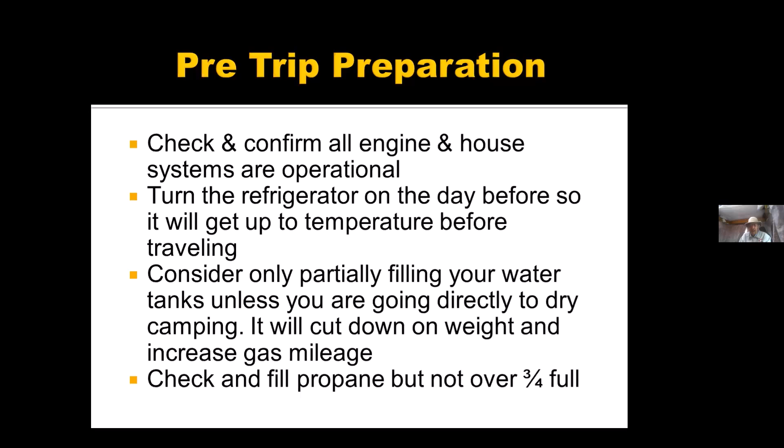There are some things you have to do before you leave home. The most important thing I can suggest is to make sure all your appliances are working properly. It's too late to find out when you're 500 kilometers from home that your fridge isn't working, or your heater or hot water tank isn't working. So check everything, and make sure you have enough liquids in your Roadtrek, like propane, gas, water, and so on. Most people make a little pre-trip checklist and go by that.

Some people refer to these as idiot lights because in many cases they don't work. I've been lucky that mine have always worked, and I think there's a trick to that, especially for the freshwater, holding water, and gray water lights. The trick is that you must really clean out your black water tank properly at the end of each trip. One thing I usually do is use a gadget like a hose with a twist, with a brass tip at the bottom that rotates and cleans out the tank. So if your lights aren't working, try cleaning out the tanks properly to make sure the lights work.

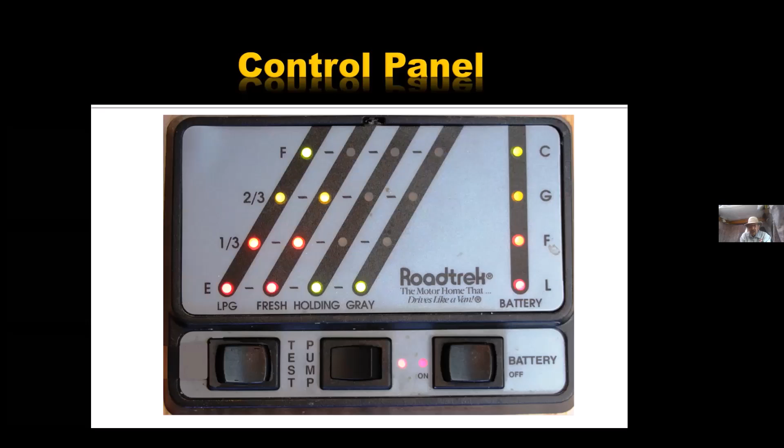As far as leveling is concerned, I don't pay too much attention to it because most of the time the sites are reasonably level. What I do is try to make the rear of the Roadtrek slightly higher than the front, because when I open the washroom door, it swings out and doesn't come back at me. So I make it about an inch higher at the back. Other than that, most people think normal level within an inch front to back should be okay.

For your fridge, which works on an absorption basis, ammonia absorption, if it's too much out of level, the fridge will not work for you.

The other thing is checking the voltage. If you're hooked up to power, you have to check the voltage. There are several gadgets available to check it, and recently there was a discussion about making sure the voltage doesn't fluctuate too much. There are all kinds of gadgets available, one of them called Surge Guard.

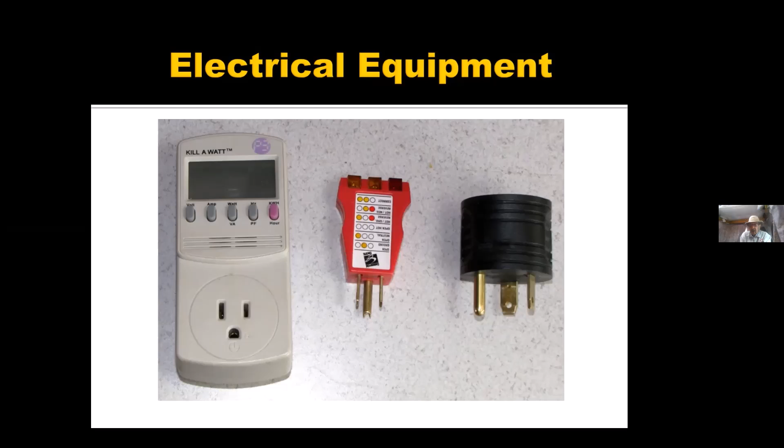So the moral of the story is that if you can have a gadget that checks the voltage on the pole where you hook up, it's a good idea. There are some gadgets shown here to check the voltage.

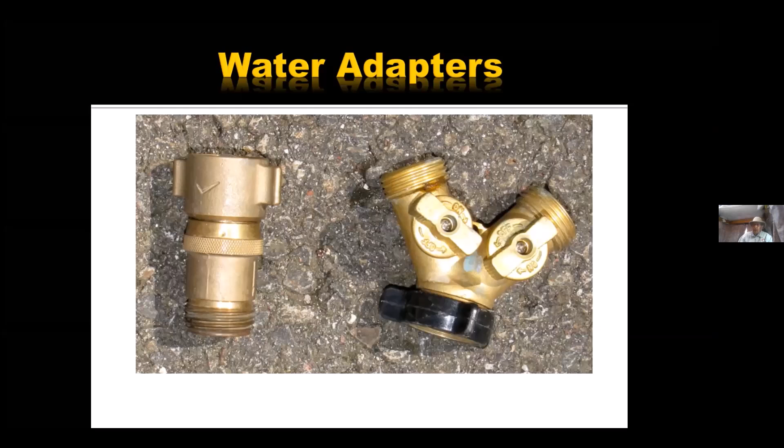Okay, so a couple of points here. I already talked about shore power. As far as the generator is concerned, for those who have one, it's not a good idea to run it when you're in a crowded campground because it will be a noise generator. So in many places, most people ask their neighbors if it's okay to use a generator for a little while. If you're boondocking, of course, there's no problem, you can use the generator.

The thing about a generator is that you have to make sure it is working properly. The secret to that is to run it off and on. Even during the winter, I run my generator for about 2 hours per month. It's called exercising the generator, and that keeps it going.

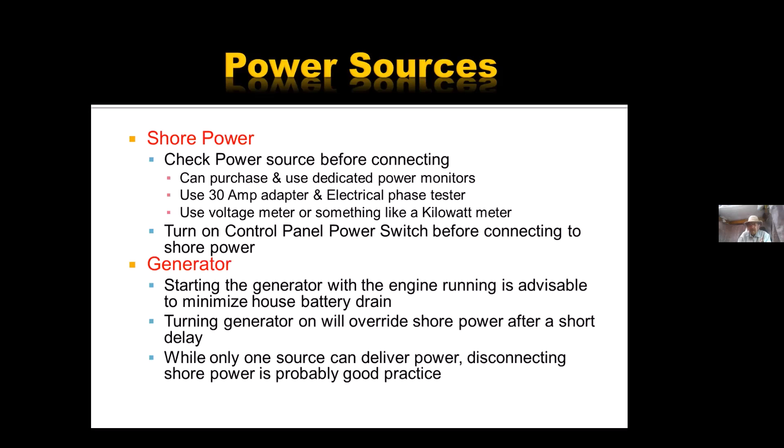Another thing I should point out is there's a product you can buy at a store called Seafoam. This product is extremely useful for cleaning the carburetor in the generator and running it smoothly. What I usually do is put a can of Seafoam every second fill-up of the gas tank. Also, sometimes if the gas goes down to about a quarter of a tank, I put in a can and run the generator for about an hour. The whole idea is to keep the carburetor in the generator working.

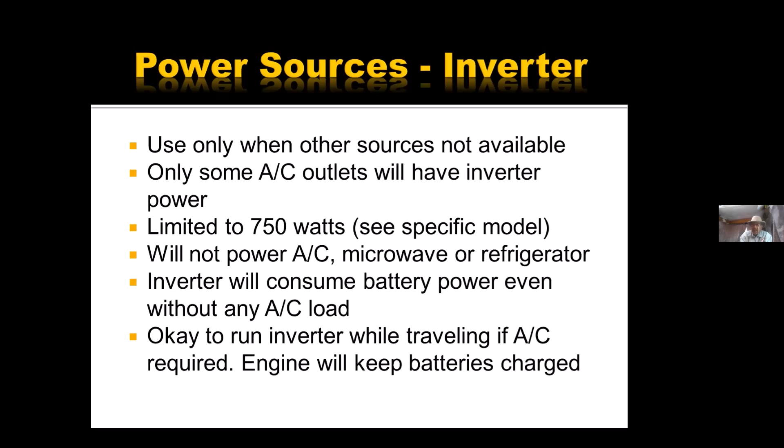Some people have inverters on their rigs. I don't have an inverter, I have a gadget called a power box. It works like an inverter, but it's also an additional battery I can use. The important thing to remember is that with inverters, unless you have one of the more recent ones, you can only power small appliances like computers and iPhones. You cannot run the air conditioner or the microwave on an inverter. So inverters are meant for small appliances. When you're traveling and driving, the inverter will keep charged up. So if you don't have an inverter, you can kind of add some sort of inverter yourself.

There are safety monitors in the Roadtrek for carbon monoxide, propane, and smoke. The important thing about these safety monitors is that you have to keep them up to date. I didn't realize that, I thought my monitor was working because there's a test button, and if it beeps, it knows it's working. But when I talked to the technician at Mobile Life, he said that even though it's working, it's a good idea to replace them every 5 to 10 years. So it's just a safety feature.

The other thing about the monitors is that on the control panel I showed earlier, there's a switch called the battery switch. If the battery switch is left on and the Roadtrek is sitting on your driveway, at some point your house battery will go down because these monitors, which are hooked up to the battery, continue to use power. So if you expect the Roadtrek to be parked for any length of time, turn off the battery switch. Also, if you take the Roadtrek to a garage to get it repaired, turn off the battery switch. These are the 3 kinds of monitors that most people have, and again, change them if you haven't changed them for a while.

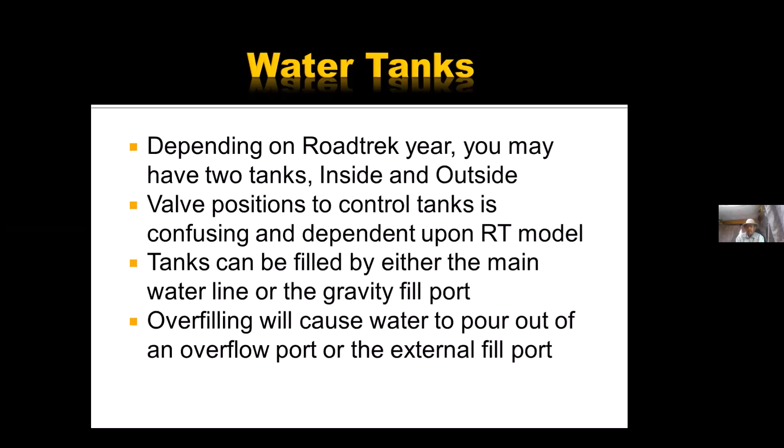I think you may get into solar and generator more later, but there's a question, does anyone have a solar generator? I think we'll address that later in the presentation. Okay, just remind me about it.

This is concerning the plumbing system of the RV. There's a pump, and some people put a filter on the outside water coming in. Some people use a pressure regulator. I have a pressure regulator, sometimes I use it, sometimes I don't.

I think the thing to do is, when I turn the tap on the hookup, I don't turn it on completely, I just turn it on just enough so that there's enough water coming into the RV. But it's a good idea to have a pressure regulator so that you don't end up bursting the pipes, since the pipes are all plastic.

As far as the pump is concerned, sometimes if there's a leak in your RV somewhere, off and on during the night you will hear the pump come on. So the thing to do is either try and find where the leak is, and if you can't find it, just turn the pump off during the night so you can sleep peacefully. I had this problem one time, and eventually I found the leak and fixed it.

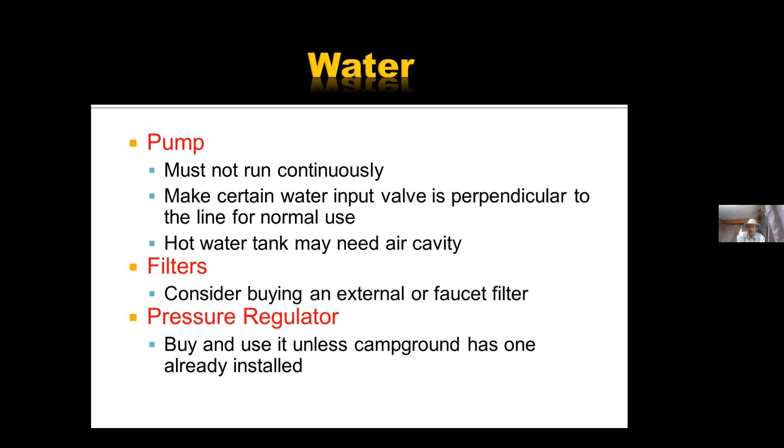You had a comment there about an air cavity. The hot water heater may need an air cavity. That's a surprise to me, I wasn't aware of that. There has to be an air cavity at the top of the hot water heater.

That's what, and I think that has something to do with the workings of the T and P, temperature and pressure valve that is in every hot water heater. The temperature and pressure valve works best if there's a little bit of air at the top of the hot water heater. So how do you tell if there's an air cavity there?

You can't tell that. You just hope that it's working. And if you find some problem with it, then you drain the water and make sure that your temperature and pressure valve is working properly. Some people have had to replace them.

This is the setup for the city water. The black knob is turned vertically. That is its regular position. When it is parallel to the pipe, that means the city water is being put into the freshwater tank. This looks different in different Roadtreks - in mine it's like a gray tap, in this one it's just a black tap. The important thing to remember is that when this valve is perpendicular to the pipe, the city water cannot get in. In order for the city water to get in, you turn it parallel. And then don't forget to turn it back, otherwise your water pump will not work.

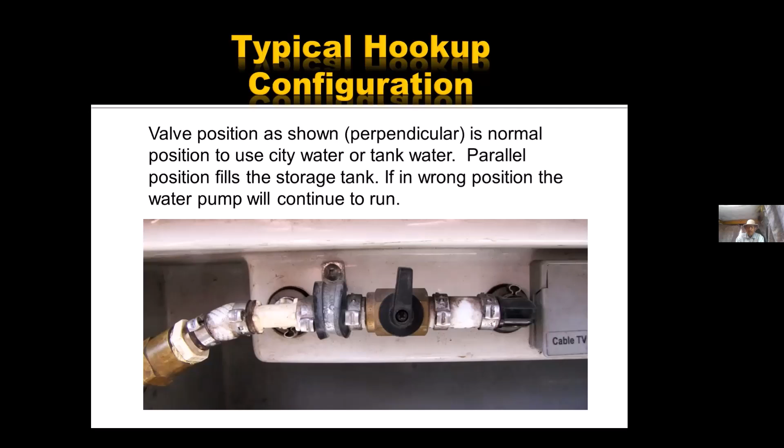Yeah, I have a water leak from the top of my freshwater tank. When I fill it, it starts just pouring out all over the place, and the water does. I can't find the leak because I figured it would be a cracked fitting someplace, but those are usually on the side of the bottom, and I can't get my head up in high enough to see where the water leak is coming from. Anybody else have this problem?

Dan, you don't have to worry about that. I also have a similar situation. When I fill up the freshwater tank, when it is completely full, there is an overflow valve, or overflow opening in the tank, and the water drains out of that overflow opening. That really tells you your freshwater tank is full and you have to turn the tap off. So it's not anything to worry about, as long as your monitors on the control panel tell you that you have a full tank. I watch for the monitor when it reaches the green light. When I see the green light, I know my tank is full. I don't wait for the water to come out of the overflow valve, I just turn the tap off. So I don't think it's anything to worry about if it only happens at the time when the tank is full.

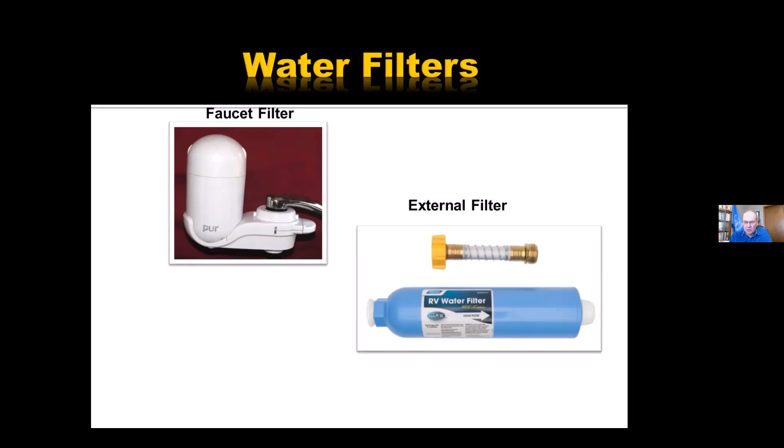Okay. Now, I already talked about the black and gray water tanks, and I mentioned that those lights are not usually always reliable. So the best thing to do is to try and flush out the black water tank.

I wanted to show you this gadget that I have that I use every time I flush it. This is the gadget. Here at the bottom, it has a turning wheel, and when you hook this up to the hose pipe, this wheel turns and sprays water inside the tank. So every time I do the black water tank, I try to flush it out.

Now, of course, in some cases you don't have availability of water to flush it out, but then you can wait until you get to a place where there's water to flush it out. The other thing I should mention is that sometimes if you're parked in a campground and there is a drain hole at the campsite where you can drain your black water tank, it's a good idea not to drain it while you are using it. It's a good idea to let it build up, let the water level build up, and then just before you leave, you can drain the black water tank.

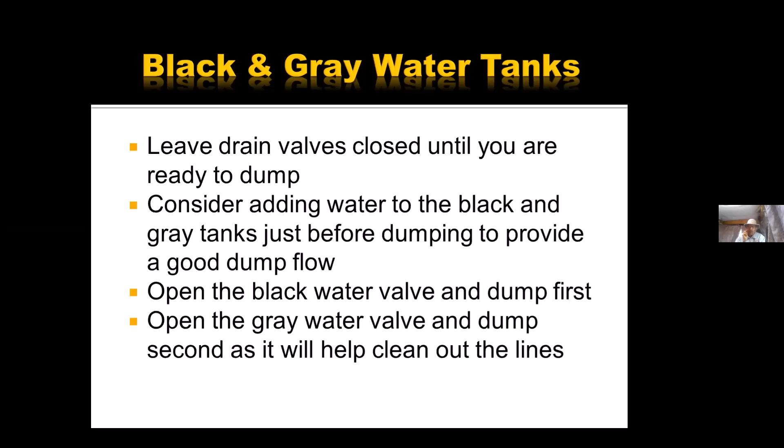Make sure that the two handles you have, the gray water handle and the black water handle, are pushed back in before you take off. These are the two handles.

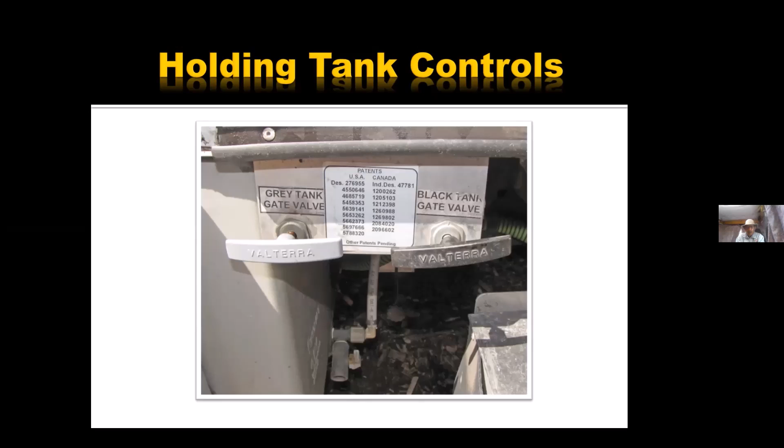When I got the Roadtrek first, both handles were colored black. So in order to remind me which is the gray water tank, I just took some gray paint and spray painted the gray water tank handle, so I know which one is which. Small trick.

Now, some people have macerators. I don't have a macerator. If you go on the internet, on the Roadtrek International Cyber Rally site, you'll find all kinds of issues with the macerator. In the beginning, when the macerators came out, there was a big issue about the macerator hose. It kept breaking up and people didn't like it, so there was a lot of talk about how to replace the macerator hose.

One thing I've found out in talking to people is that if the macerator gets stuck, there should be a way to manually rotate the propeller. I don't have a macerator, so I can't give much advice on it. The only thing I can say is that I have friends who have macerators, and I've seen them turn on the engine to charge up the battery before they use the macerator.

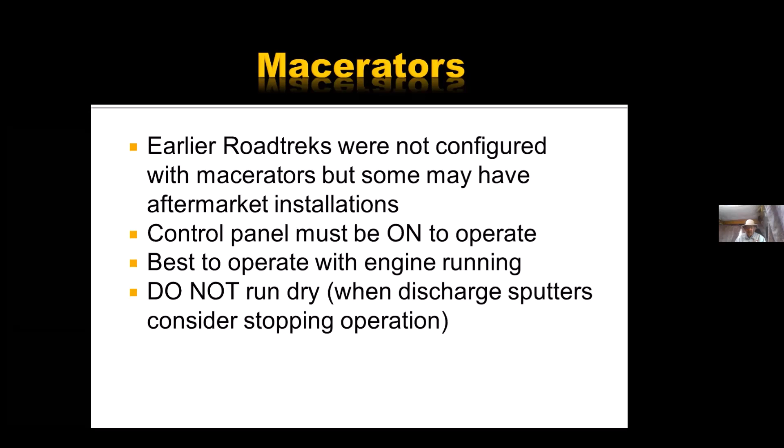Then Sam had a question on the dump valve. Sam, do you want to hit your space bar? Hey everybody, hi, it's Sam. Hi Sam, hi everybody, hi Harish. Hi guys, very quick question.

I know it's a bit of a silly question, but it was never clear to me from the start. I was always advised to dump the black first and then dump the gray so that the gray would flush out the black. But I haven't actually crawled under the vehicle to see how that valve mechanism works. Would I pull out the black valve, close it, then open the other one and close it? Or would I leave the gray one open, leave the black one open, and then pull the gray one so it flushes everything more thoroughly? Does it make a difference whether I leave the black valve open as I flush the gray tank? Does anyone have a quick answer for that?

I have always left the black valve open when I open up the gray valve, and I keep both of them open until after I have flushed it. The reason to leave the black valve open is because you also want to flush it. So I don't think you need to close the valve after you've drained the black water. You leave it open until the end of the entire operation.

Okay, perfect, because I wasn't sure. Initially I had pulled the black, flushed that, closed it, then opened the gray, flushed it, and then closed it. But what you're saying now is I can leave the black plunger pulled out as I pull out the gray at the same time, to flush it even more thoroughly.

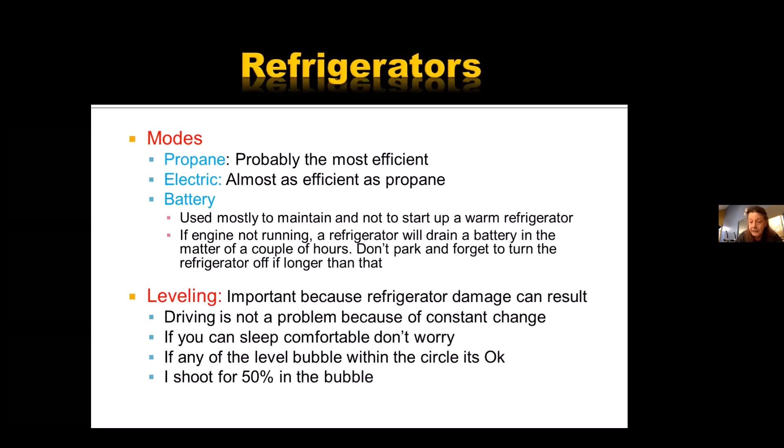Those of us who answered pretty much all said it's a very common problem. The fridge works much better on propane than electric in general, and does not work well in high temperatures either way. Some suggestions were a small refrigerator fan placed in the fridge to circulate air. Another common solution mentioned is filling two plastic bottles with water, putting one in the freezer, and rotating them from freezer to fridge to keep extra cooling product in there. Someone also mentioned making sure the fan blows across the cooling fins. But most of us just know it's one of those things you live with on the Roadtrek.

One other point I should mention is when you are done with your trip and come home, take your stuff out of the fridge, put them away, and leave the fridge door open so the water inside evaporates. Otherwise, mold will build up inside the fridge. What I do is spray the inside with some vinegar, clean it up, and then close it. For the next trip, I'm ready to go.

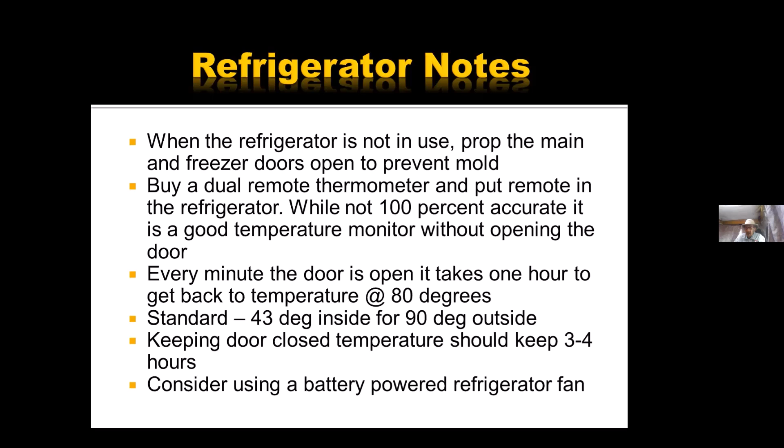So it's a good idea to keep the fridge free of mold. The only way you can do it is to make sure there is no moisture in the fridge, and to do that, you just leave it open for a while.

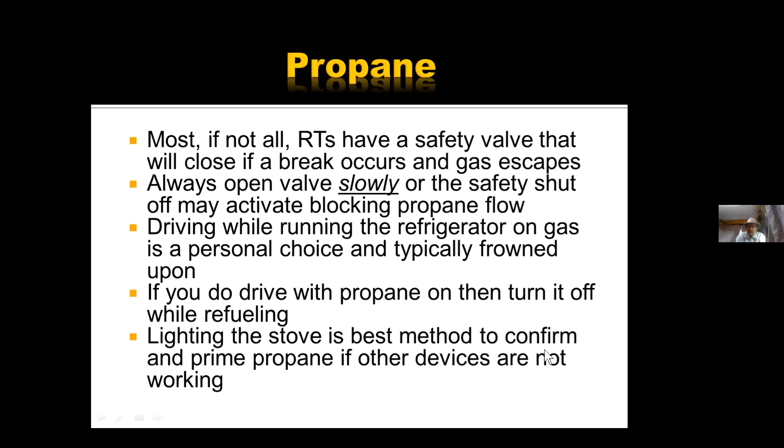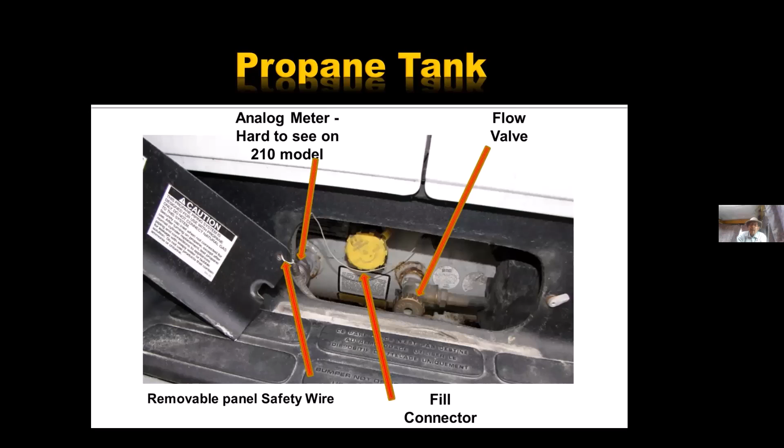One other thing is that in most of our vintage Roadtreks, the regulator for the propane tank is situated on top of the tank. It's very difficult to get to. So if you have any issues with the propane, you may have to spend some money to get a technician to get to the top and fix that regulator. I think it's called a regulator.

Generator, I already talked about servicing it. A lot of people have problems with generators. There's not much you can do about it, just keep on top of it. The most important thing is to make sure that it's exercised regularly.

Air conditioner. I have replaced my air conditioner twice, and I have to tell you that it's not an easy process. The air conditioner is sitting at a very awkward place, and in order to remove it, you have to approach from the back. You have to take out the grills at the back, and you have to take out the goop that's holding the air conditioner, and then one person pushes it from the back, and another person pulls it from the front, and you take it out, and then you replace it. So it's not an easy process.

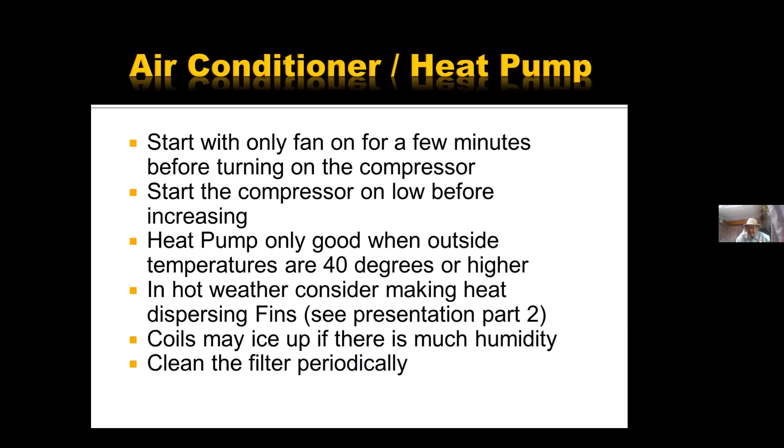Can I carry on? Yes, we got the rally right here, and we got the international Roadtrek rep here doing it. So we've already got our own cyber rally, man. Yeah.

Can I also add, relating to that, you do have to belong to the FMCA, Family Motor Coach Association, in order to join the Roadtrek group. It's something to think about. Yes, it costs, but it also has added value—membership in the FMCA includes a medical evacuation plan that would cost more than the FMCA membership itself. It's called FMC Assist, FMCA Assist.

But definitely you'd have to belong to both organizations. Yes, Debbie's right, because Roadtrek International is a chapter of FMCA, so in order to belong to Roadtrek International, you have to become a member of FMCA. The expense is something like $60 American for FMCA and about $30 for Roadtrek International. I just got my bill, it's up to $75 now.

They are struggling. Can I also make a comment? The Cyber Rally files are still on the Roadtrek International site, but the actual group comments have moved to groups.io. There's also another Roadtrek group on groups.io called Road Trekkers, which also has a lot of information and files to search. So the point of all these comments is that there's a lot of information available, whether it's your fridge, air conditioner, or water pump.

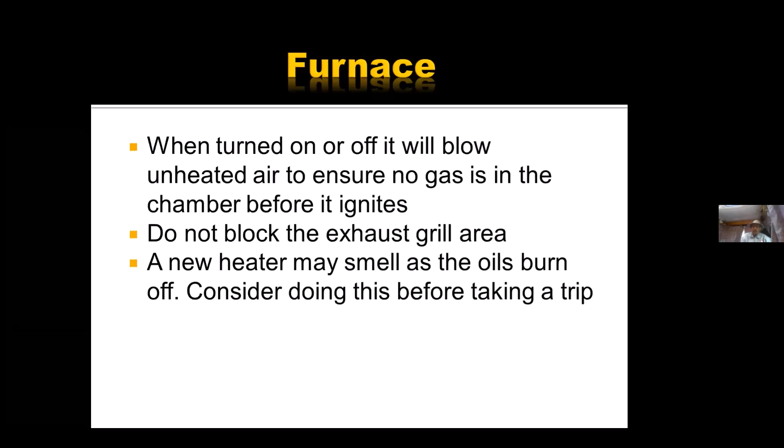There's been a lot of discussion about the hot water heater. At the bottom is the anode rod, and this is what it looks like. Mine is a little bit chewed up at the entry level.

So the thing to do is when you winterize, you take the anode rod out and drain the water out after putting the hot water bypass on, and replace the anode rod if it looks chewed up, like at the end here. The other thing I want to point out is that this nut is a 1-1/16 inch. You need a 1-1/16 inch socket to take this out and put it back on.

Other than that, I think it's important to make sure that the burner... before we go on, I had just gone to the back of my rig to pull out this thing here. This is a filter for the air conditioner, so I make sure that I pull it out every time, clean it up, and put it back on.

Sorry, but backtracking. Some people complain about their hot water heater not working properly. In most cases, what happens is spiders and stuff get into the area where the gas comes in and burns, so the thing to do is make sure it's kept clean. There's also a reset button there - if the heater stops working, you can always reset it.

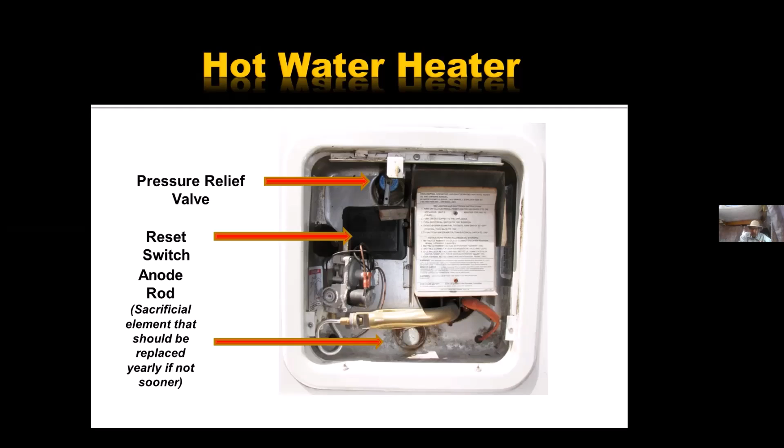Next, Gary mentioned the sail switch. Do you want to comment on that as a common troubleshooting problem?

Yeah, for people who find their furnace is blowing cold air, and they check that they have a full tank of propane and their stove is working okay - the most common failure of the furnace is a mechanical sail switch, which allows the furnace to know that the fan is running, and therefore it can ignite propane and generate heat. If for some reason that switch sticks, which unfortunately happens once in a while, especially on an older unit, then even though you have propane and the furnace is electrically working fine, it simply won't open its gas valve to feed propane to itself. So that's not necessarily a user serviceable item unless you're pretty handy, but something to consider.

Another thing I wanted to mention with regard to the hot water heater: to save propane and also not waste water by having to mix hot and cold, I took a simple remote sensing aquarium thermometer where the probe is separate from the display, and stuck the probe into the styrofoam/putty right next to the outlet pipe of the hot water heater, so I can monitor that temperature. After a little experimentation, I figured out that I can turn on the hot water heater, watch that temperature gauge from time to time, and when it hits a particular number, shut off the heater - then the hot water, running full on your tap, will be exactly the temperature you enjoy. So no mixing necessary, no guesswork, and no waste. The thermometer cost about $3 on Amazon, so just a helpful hint.

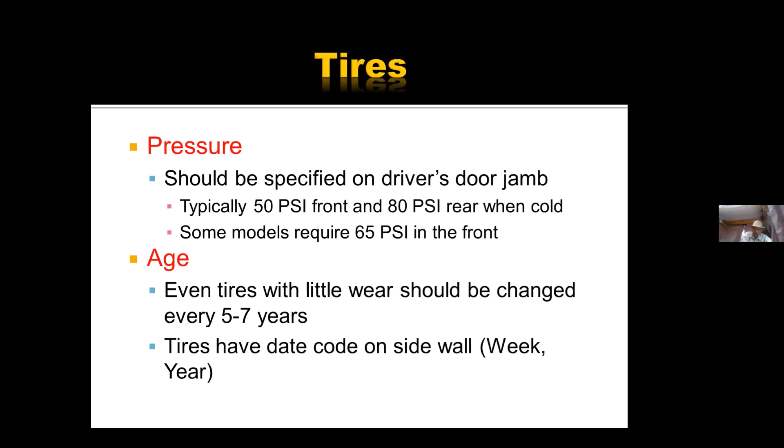Lead acid batteries and AGM and gel batteries. In the back, I have AGM batteries. I used to have gel batteries, but I replaced them with AGM, which is the house battery. So in the back, I mean the house battery. And in the front, the engine battery, is a lead acid battery.

The thing to remember about AGM or gel batteries is never to let the voltage in the battery go below 10.5 volts. I have a little gadget attached to one of my cigarette lighter plugs that always tells me the voltage of my house battery. I think it's good to monitor the battery by turning off the battery switch when you don't need it.

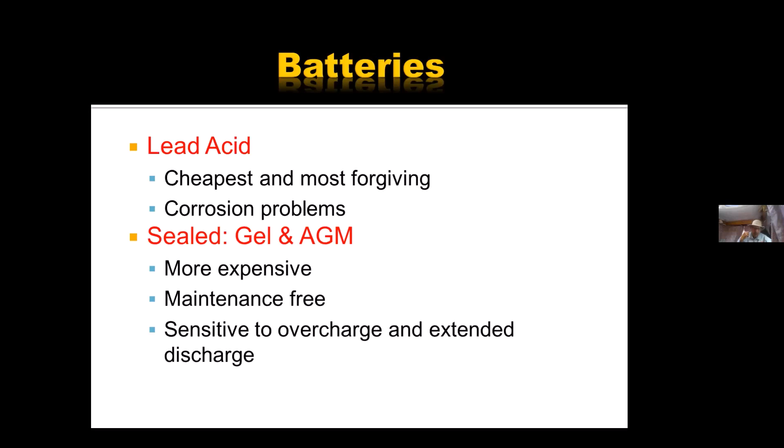What happens when the voltage drops below 10.5 is a process starts called sulfation, and that ruins the battery cells. So I prefer AGM, but some people prefer gel. Some people also have wet cell batteries or lead acid batteries as house batteries. I have never had it, I'm not quite sure what maintenance is required. I know the battery in the front, the engine battery, off and on I have to check the water level in it, or the electrolyte level.

We've got a comment here from Simon about house batteries. He's suggesting we try to make sure we get a deep cycle battery designated for RV repeated discharges. Good point. Good point, yeah.

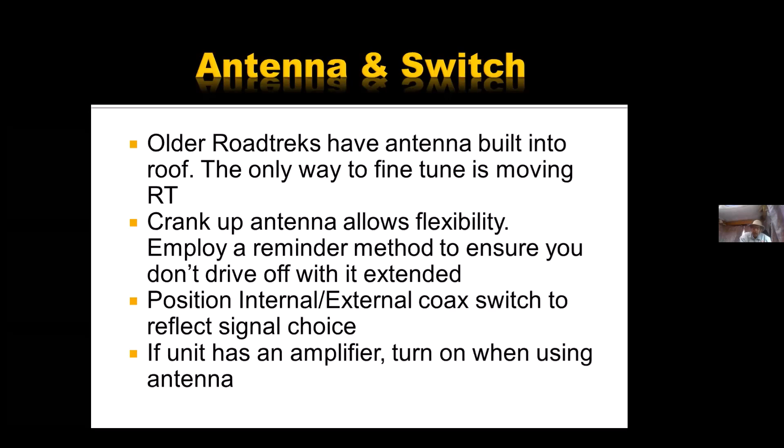As far as antennas are concerned, there's a switch somewhere inside your TV cabinet that switches between antenna and cable. I have never used cable because most of the campgrounds I go to never have cable. So I've used the antenna, the existing antenna on the Roadtrek, which runs around the ceiling all around. Most of the time when I've camped in a reasonably good place near a good population, I can get some 3 to 4 TV stations.

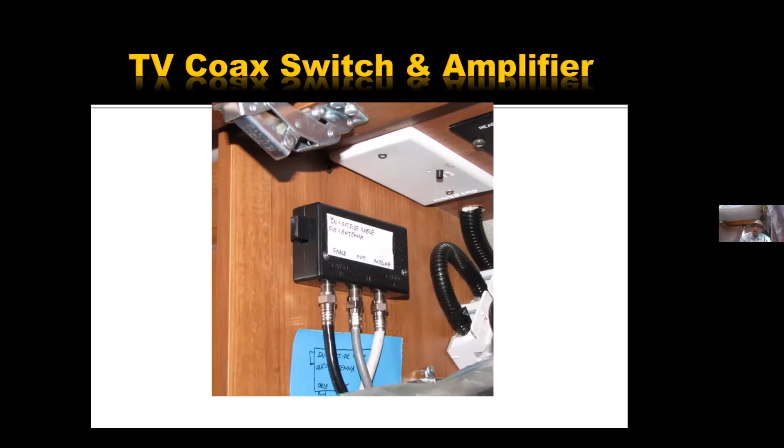We don't watch TV much when we're camped because there's so many other things to do. I've seen Roadtrekkers with all kinds of satellite dishes and equipment to watch TV, but I think when you're Roadtrekking, there's a lot more other things to watch than TV. I do have a DVD player in here, and sometimes on a rainy day we just turn the DVD on and watch it.

In my RV, I've got actually 2 attachments, I don't have a switch. I got a 2000 Dodge Versatile, and I have 2 attachments, one for the coax cable and one for the antenna. So rather than a switch, you may have 2 places to attach your television to.

Good point. As far as the awning is concerned, the important thing to remember is don't leave the awning out at the end of the day when you go to sleep, because you don't know when the wind will pick up, and it's not good for the awning. I find it easier to roll out the awning halfway, which is safer too, so that my outdoor furniture can sit underneath the awning when I'm gone to bed. If it's like 2 or 3 feet from the wall, it's not a big risk for the awning to be affected by the wind.

Another thing some people say is that if you take the middle support rod off the awning, it helps drain the water better. You have to have one side of the awning lower than the other, and the rainwater drains out better if you don't have the middle support rod in. I have tried it and it seems to work.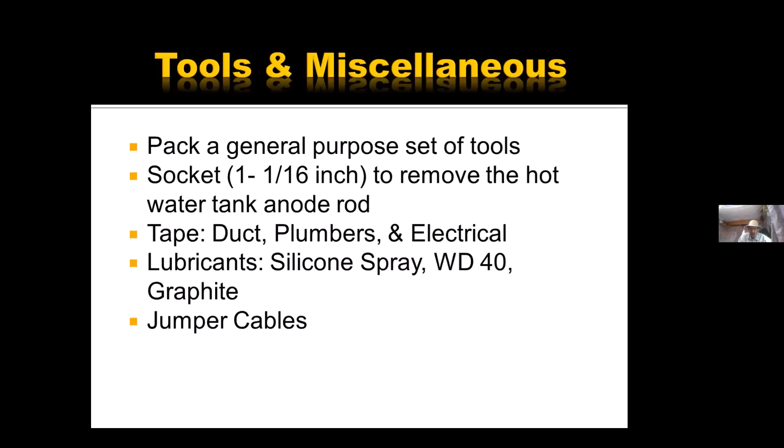Most people are familiar with what kind of cables they have to carry. Some pictures here. General maintenance, you have to take the usual tools, etc. Tape, duct tape, WD-40, silicone spray, jumper cables, the usual stuff, always carry a little packet of tools with you. First aid kits, flashlights, etc. These are the essential spare parts. Everybody does it according to their own requirement and what they think is necessary. Just make sure you have some spare parts available if you need them.

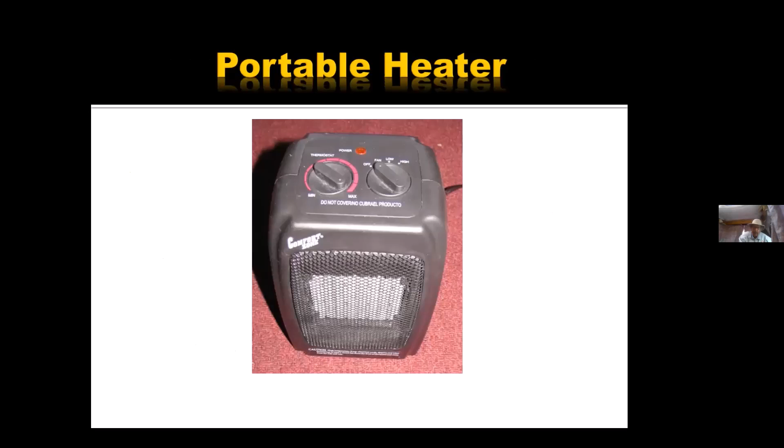One of the things we did when we went to Alaska, twice, is I always carried a belt from the front of the engine - what's it called? The serpentine belt. I always carried a serpentine belt on long distance trips because these things are hard to get when you're in small towns. This is a small heater you can use to heat up. Again, just all common sense things, make lists of everything.

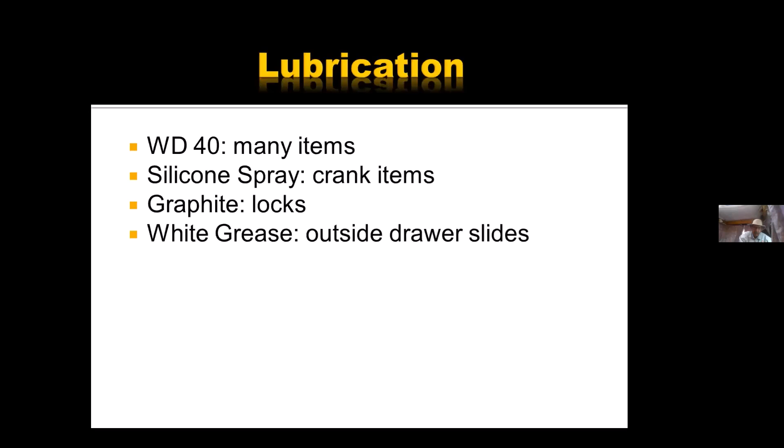There's a lot of information online about winterizing and dewinterizing, so I don't think I need to spend special time on it. I have a bypass valve on my hot water tank, so I only use about a couple gallons of winterizing liquid to winterize the tank. Some people put antifreeze in their tank and pump it through the pipes, others just blow out the water. Different people use different techniques, but the important thing is to not have any water left in the tubes or pipes.

Is there anybody here that just blows their lines out and doesn't use antifreeze? I've done that, and ultimately found that unless you've got a compressor with a variable regulator to stay at or below 40 psi, it's a bit risky and a pain. You also need certain adapters so you don't have to manually hold the air pressure outlet to the city water inlet, which is where you'd blow the water or air in.

Ultimately, I found it's easier to use the three-way valve at the pump that lets you suck the antifreeze into the system very easily, using only about 1.5 to 2 gallons to winterize a whole rig, which in my case is a 210.

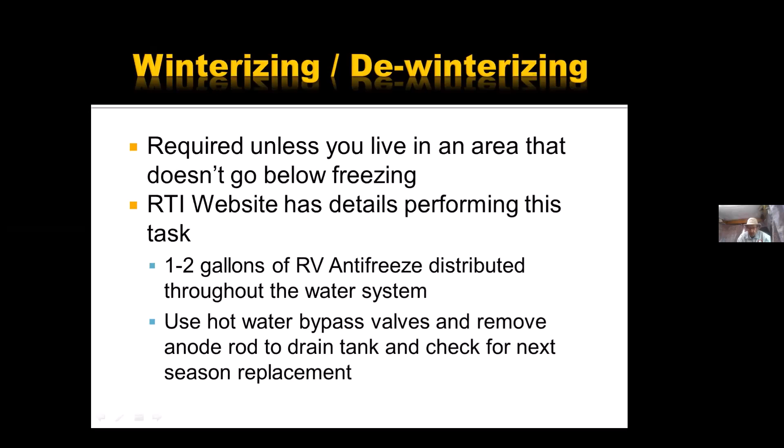This presentation that I'm presenting is also one of the web pages at the roadtrekchapter.org website, but you can only access it if you are a member.

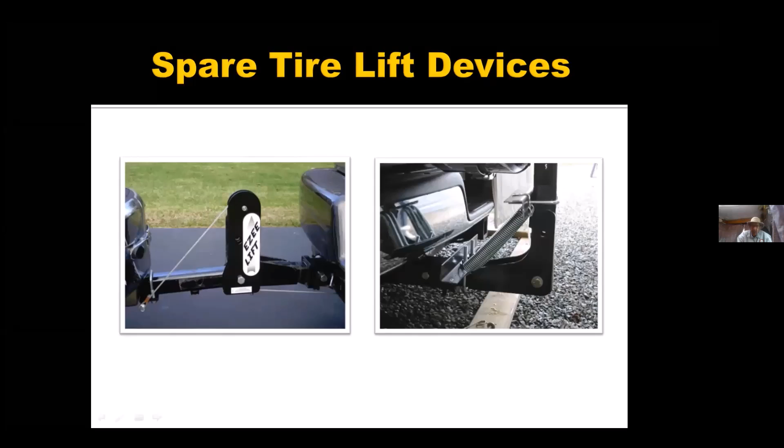Overnight parking, Walmart and this and that. The important thing to remember is that if you park at Walmart, make sure you have permission from them. I usually go to a Walmart where other people are parked, and I ask them if they've asked for permission. The important thing is you don't set up a campsite at a Walmart parking lot, you use it only for overnight. We've used other places to park at night when we're stuck - I have parked at pharmacies, school libraries, hospitals. So if you're stuck, you can always go and ask if you can overnight park there.

GPS is good, it's good to have if you're going into unknown territory. Also, backup cameras are good to have. I have one installed here on my rig. I went for a wired backup camera as opposed to a wireless one because I wasn't quite sure if the wireless would work properly. My good friend Roger Brooker, who goes by Redrick Rover, helped me install this backup camera.

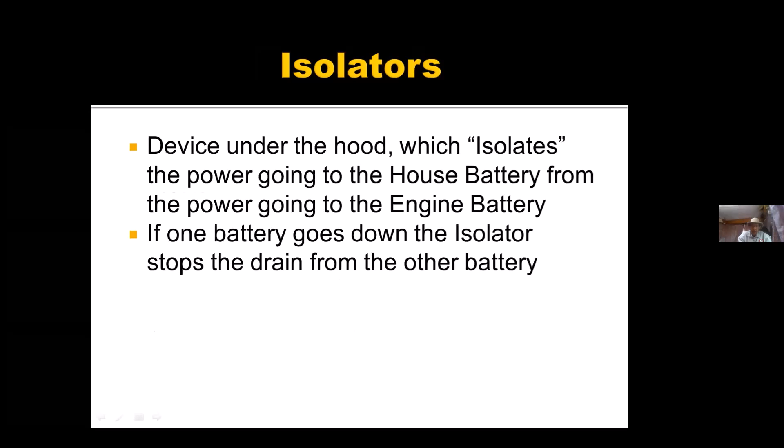There are devices under the hood you should be familiar with. One is called an isolator, one is called a separator. Basically, this device isolates the voltage coming from the part that generates electricity, the alternator. On my isolator, I've got labels attached - on the left-hand side it says to engine battery, on the right-hand side it says to house battery, and this is from the alternator. The isolator does the same sort of thing, and the separator does the same sort of thing.

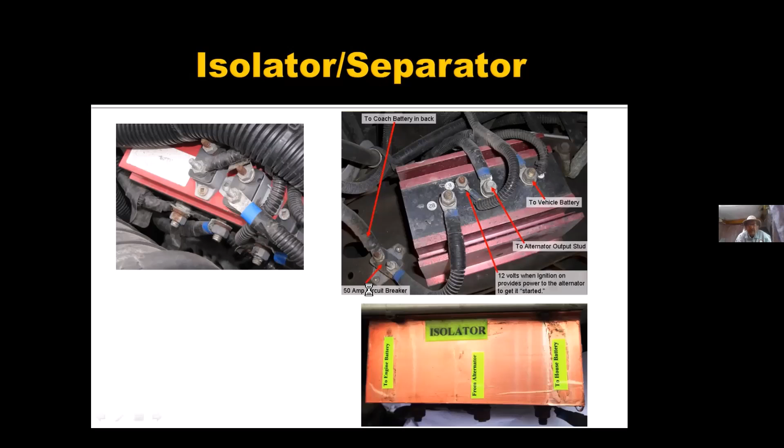The separator works with a solenoid. So is everybody clear on the use of the isolator and separator? Any questions? No.

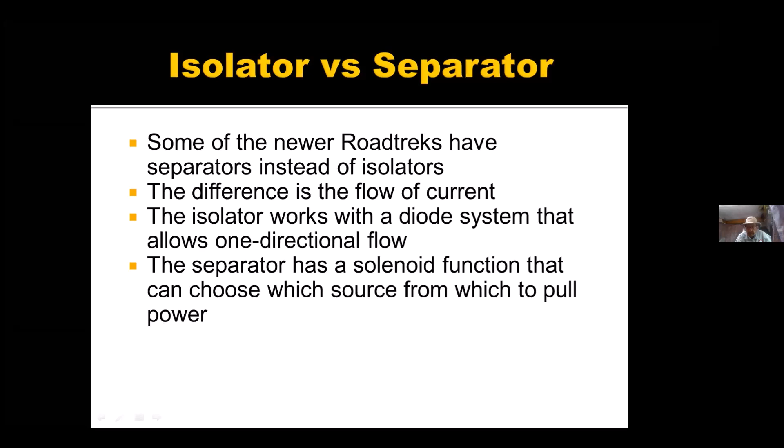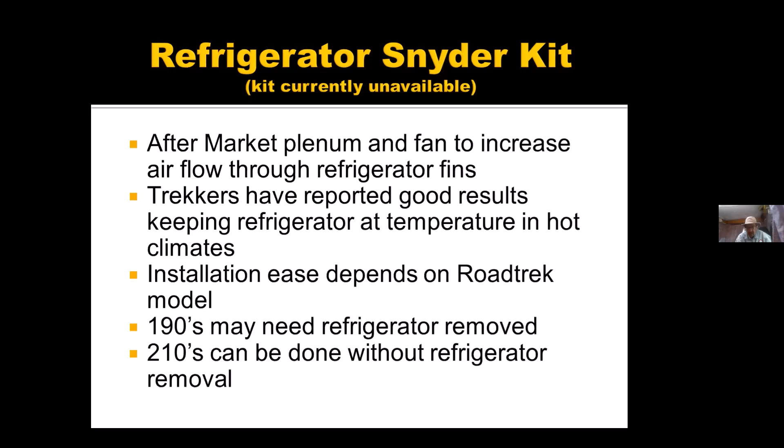There is an organization called Solo Trekkers, which is for single people. If you go to the Roadtrek International site, it will give you a contact person to talk to about solo trekkers, single people traveling. They don't have any rallies or anything on their own - most of the time they have a rally in conjunction with another rally that people go to. So there's an organization called Solo Trekkers.

For most people right now, traveling to Canada is banned. But if you do happen to come to Canada, you have to be careful - make sure you have the proper paperwork and don't make jokes with the border guards, they don't have a very good sense of humor. Do not carry arms into Canada, etc. So traveling to Canada requires certain things, but you don't have to worry about your currency - your currency is acceptable in Canada too.

When traveling to rallies, make sure the pets are taken care of. When I was running my rallies, I always made arrangements with a pet grooming place where you can board the pets when you're traveling and involved with the rally. Whenever I travel, I always make sure I check all the liquids underneath the hood.

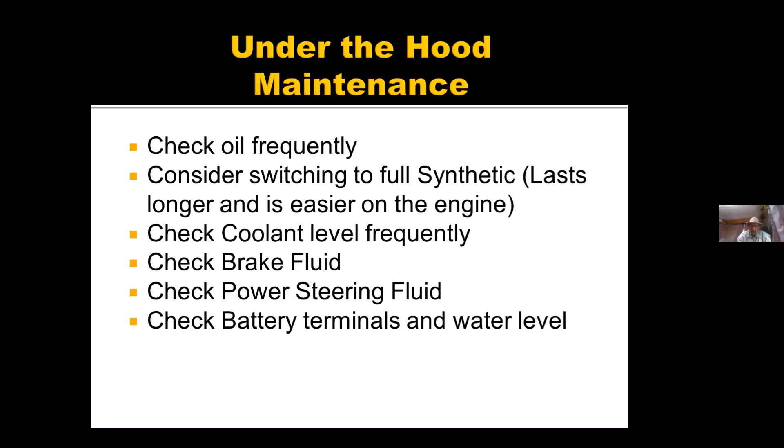We've already gone over the toilet maintenance. I don't store it indoors, I store it outside - some people store it inside. But the thing I'm kind of concerned about is that during the wintertime, you have to make sure you take your Roadtrek out for a spin every once in a while. So if you have it stored somewhere else, you may not be able to do that.

Okay, we've got a question from Joe. I can't take my Roadtrek on the road in the winter because of salt. Is it bad to let it sit without running?

I have the same thing. I store mine inside during the winter, but usually every 6 weeks I go over, pick a nice day when the sun is shining and the roads are clear, and take it for a drive for at least 30 minutes. Or if I'm going somewhere, I'll take it. Also, don't forget to exercise the generator - I do it every 6 weeks. Some people say 4. But there's no reason you can't run it on a nice day in the winter time, assuming the roads are clear.

And I suggest you do that so the brakes don't seize up and so you don't get flat spots in your tires. Aaron, I think, had a comment.

Just a real quick comment for storing your Roadtrek: don't store them on the grass next to your garage. I've bought tons of these Roadtreks and camper vans, whether from the south or the north - you can buy a rusty one if they were stored improperly. As long as you store them on a slab of cement, you're fine. But when you store it on the grass, that moisture seeps up and rusts it out from underneath. So it could be a clean, rust-free body, but you could be wrecking it from underneath with the moisture from the grass. Just don't store it on the grass.

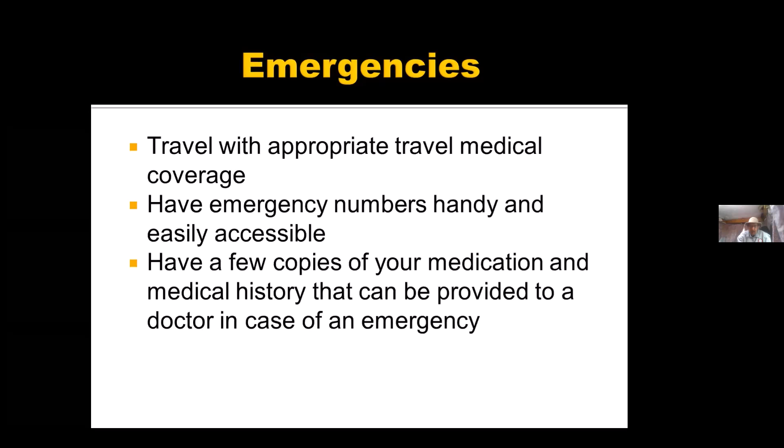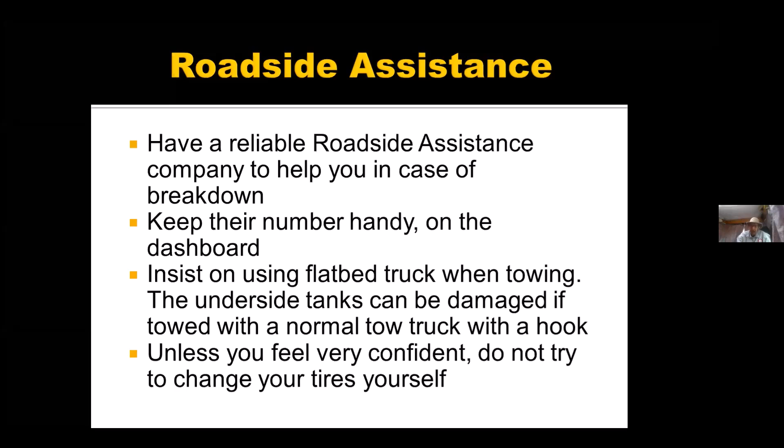Again, important things to remember about coverage and so on. Roadside assistance - different people have different ideas about this. I am in Canada, so I use CAA for roadside assistance. Other people use Good Sam roadside assistance. It depends on you. I was not very happy with the service Good Sam provided, so I went to Canadian Automobile Association. They have a feature where if you become an RV member, RV Premier membership, the first tow up to 320 kilometers is free. Then you have 4 other tows after that. So again, it's a matter of personal choice. There's all kinds of information on the net about which company is good and which is not.

Some people join the Boondockers and other associations. So that's it.

This was a slogan of the Roadtrek company: fuel efficient motorhomes you love to drive. Then later they came up with another motto, another byline, which says the motorhome that drives like a van. To that I added: the motorhome that drives like a van and brings people together that nothing else can.